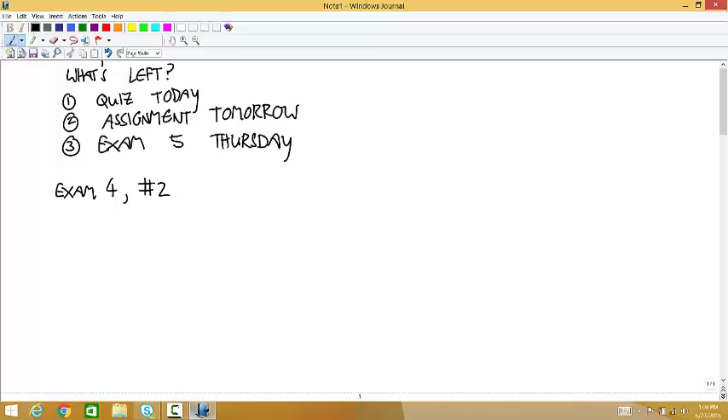Okay, let me go over number 2 on the exam. No. Yes, it's not 2, what is it? 4, number 2. So here's number 2 on the exam.

You have, bless you, you have to go back to some particle stuff, and then you also have to deal with a bunch of different angles kind of going on at the same time. There's a 45-degree angle here.

There's a pin and slot joint up here where this is 20 degrees from the vertical. And then there's a little cart thing sliding along a 60-degree angle like that.

This is 100 kilograms. This is 20 kilograms. And the first question is, what's the cable tension? And then the second question is, what are the reactions for the beam?

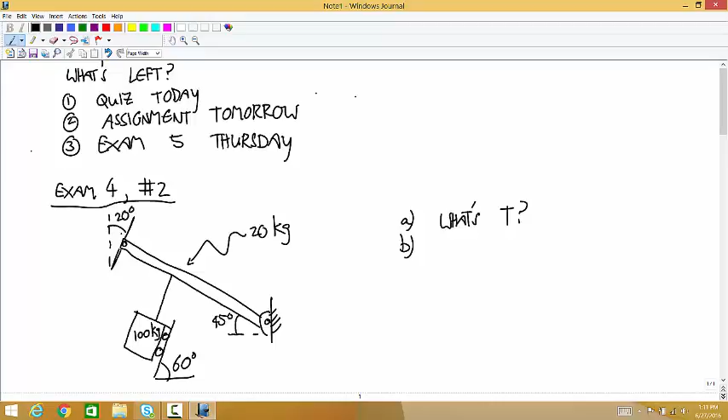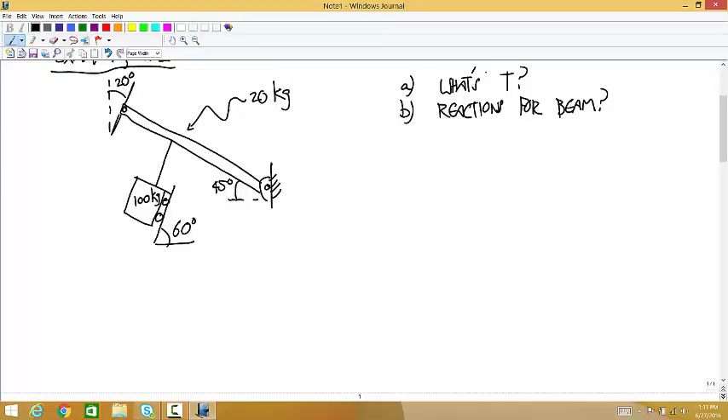Okay, so the way the questions were asked was meant to kind of lead you in the right direction. So first, to figure out that cable tension, isolate the particle, isolate the box, the cart.

Okay, so there's the cart. There's a weight force of 981. There's a normal force, and there's a tension force.

This one is just in the negative y direction. This one, well, let's think of the tension first. This angle is at 60 degrees. This normal force, you can get there by going from the positive x-axis to the direction of the tension, and then another counterclockwise 90 degrees. So 60 plus 90 gives you 150 for that normal. So that angle's 150.

So Newton's second law says 0 equals negative 981, plus T times cosine and sine of 60, so 0.5 T, 0.866 T, and then plus N times cosine and sine of 150.

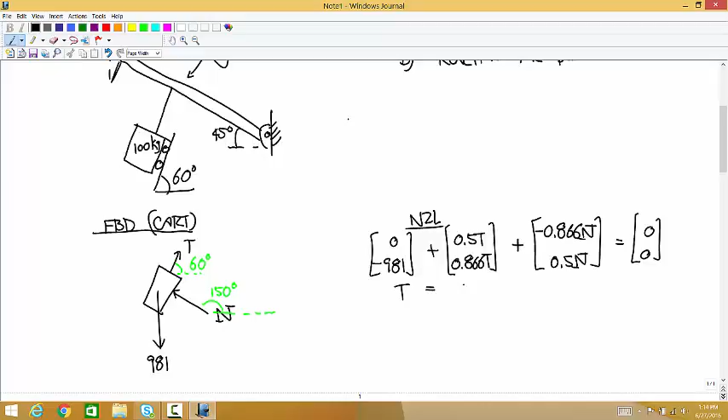You can also calculate the normal force, but I didn't ask for that specifically. And now that you have that tension, now you can isolate the beam.

The free body diagram looks like this. You have a pin joint down here, so I'll call that reaction force. It's a full force vector. I'll call it RA. Then there's a weight at the midpoint of 20 times 9.81, so 196.2.

And then there's a cable tension that's pulling in that direction. Let me make it clear that that's not perpendicular to the beam. That has to do with that 60-degree angle. And since it's a single cable, the force is the same, so that's whatever you got in the other one, about 850.

And then there's the pin and slot force that's not lined up with the beam. That makes an angle of 20 degrees here. I guess from there, I think I'll just stop there. But now you just write out the table, write out Newton's laws, and calculate.

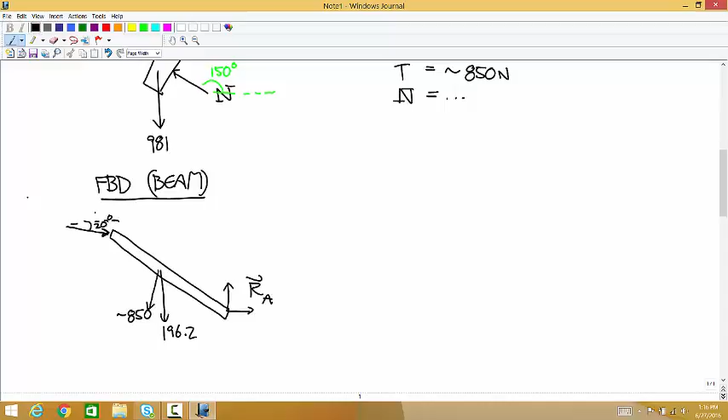You have, oh, I didn't put a label on this. Let's call that RB, that's a scalar. So you have 3 equations, Newton's second law and the rotational equation, 3 unknowns from RA x and y components, and then RB. And you can solve it.

Any questions about that? Here, Joey. Thank you. All right.

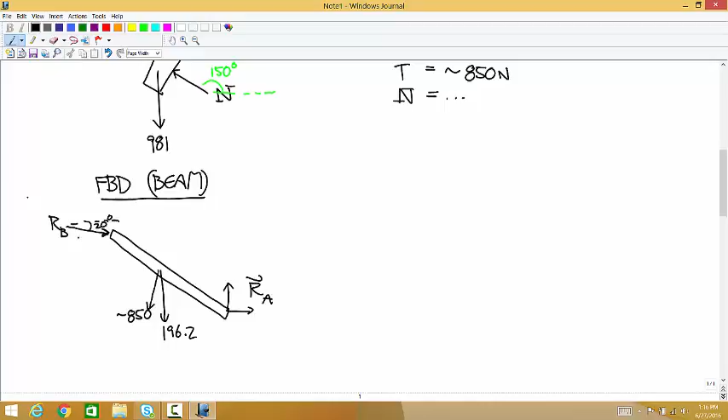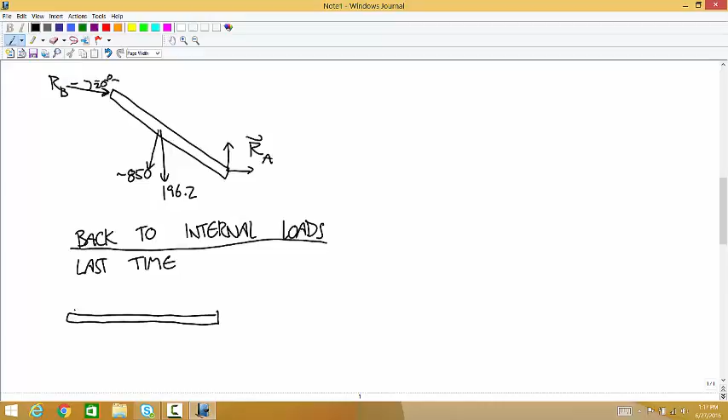Well, last time we did, so going back to internal loads, last time we did an example problem that was like this.

This time we're going to do an internal loads problem like this.

Quick question, please. Since you said that we're going to cover friction on the last exam, does that mean that we're going to have homework for friction due tomorrow, or no? No, it's not going to be due, but you'll just have to prepare on your own with the practice problems.

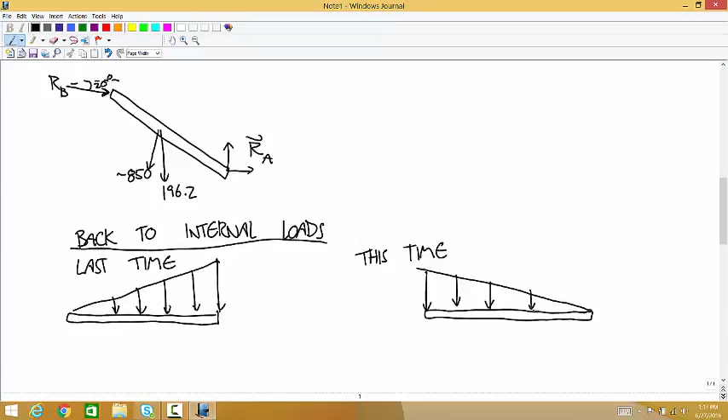Okay, so you look at that, and it looks like it's probably basically identical. We're going to see that working from the left, it's not identical. And so Alani, of course, more than anybody else, is like, well, I'm going to do it from the right, because that's her obsession.

But you could, of course, see problems where there's one like that, and then what are you going to do? So you got to learn how to do this. Okay, so what's the difficulty? This is harder. Why?

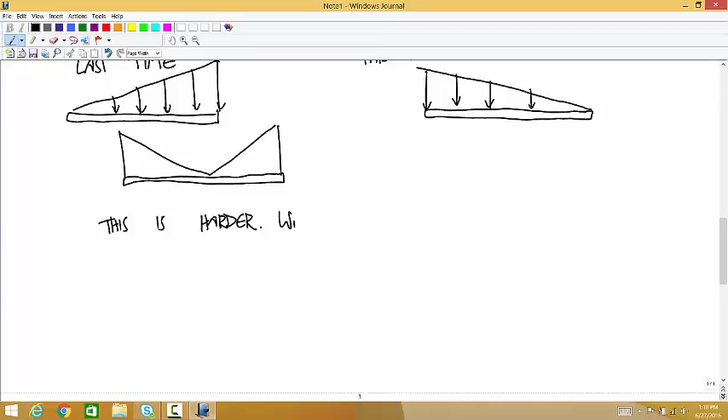The reason is, so this is your beam, and where I drew the end of that black line, let's say that's where we're doing our cut. And let's say our distributed load looks like this. When the triangle is facing this direction, when we did our cut, we just got a smaller triangle, right? When we do the cut this way, it chops off the identity of the triangle, the thing that makes it a triangle.

It chops off its point, and so now we have this trapezoid we have to deal with. And it's just kind of a mess. I mean, we're going to think through it the exact same way, but we're going to have to deal with a little more complicated geometry.

Okay, so the way we're going to do this is we're going to break up this trapezoid into a triangle, sitting on top of a rectangle.

The value of, let's say, the height of the rectangle is equal to our function q, that for any x value gives us the height of the distributed load. If we call this value, I don't know, call that capital Q.

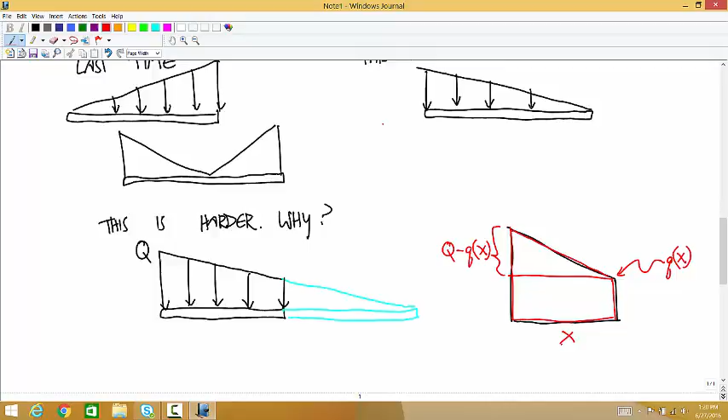And so we end up with one point force when we go from the distributed load to a point force acting at the centroid of the triangle. I'll call this area of the triangle. And another point force acting at the center of the rectangle.

Okay, none of this is horribly hard to understand or anything, it's just more steps. Any questions about the thought process on this? Okay, well, let's just do an example.

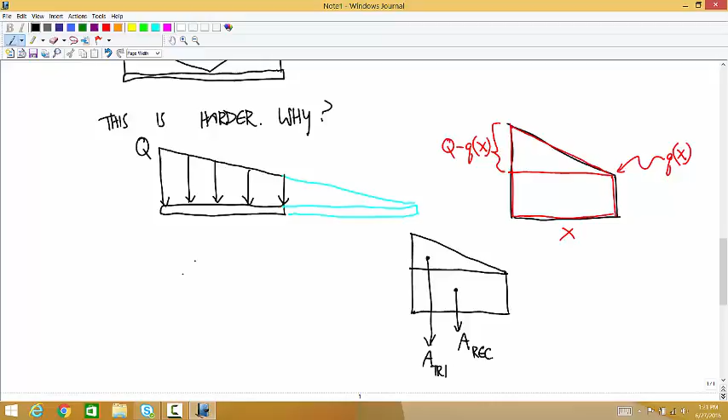What? Are we going to have 2 point forces? Yeah, so you could combine them by finding the centroid of the trapezoid and the area of the trapezoid, but there's no benefit to it. So you might as well just treat them as two separate. So instead of representing it as 2 point forces, as 1 point force, we're just going to represent it as 2, and it works the same way.

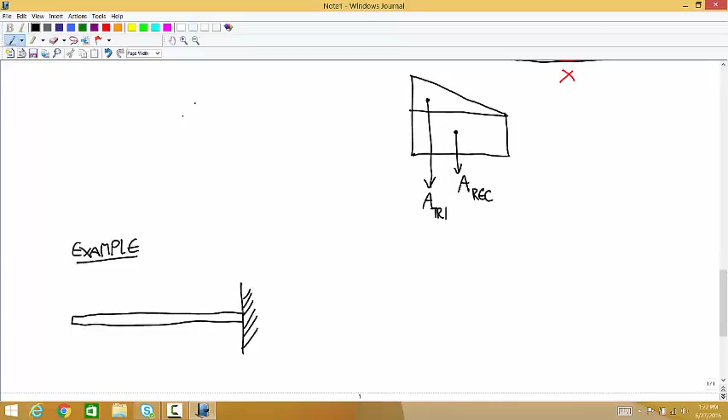Okay, so let's say we have a cantilever beam coming out from the wall on the right and a triangular distributed load with a maximum height of 5,000 newtons per meter and a length of, let's make this 2 meters.

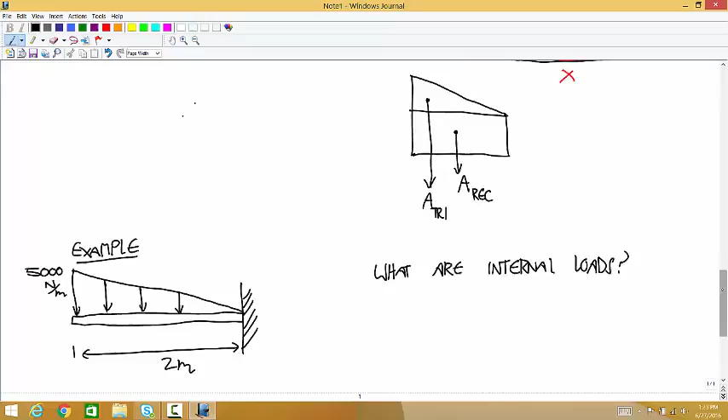What are the internal loads? So what do you think when you see a cantilever connected to the ground on the right side? Yeah, you can just go straight to internal loads because that's not going to come into it. So you think like, Yahoo! Okay, so we can go right to the cuts.

And there's, how many cuts are there going to be? Just one, because the only places where the subfunctions are going to change are the two endpoints. N is 2, so you just have one cut. So x is going to vary between 0 and 2.

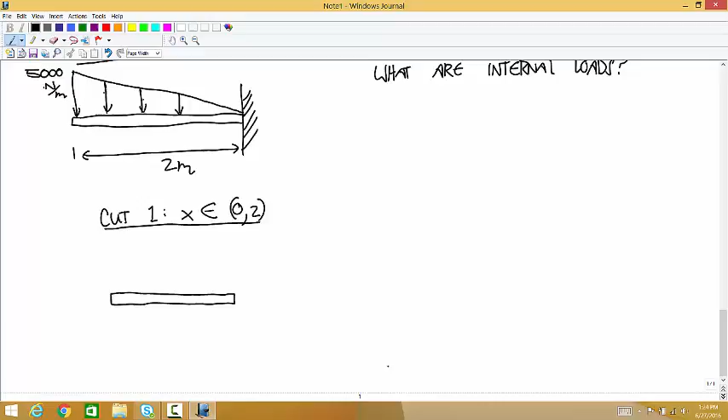And so there's the isolated piece. There's still part of the beam that I'm not drawing over on the right. And so the distributed load looks something like this. For any x value, it looks qualitatively like this. So there's the distributed load, and it's 5,000 over here because we always include all the way to the left end on our isolated body. And then T, V, and M.

All right, well, let's think about this trapezoid. The first thing we have to do is come up with an expression for the function Q that represents the height of this, that represents this line function. So...

Q as a function of x is equal to mx plus b, right? It's a line. What's the y-intercept? When x is equal to 0, what's this equal to? Yep, so it's equal to mx plus 5,000, with the triangles going the other way, when x was equal to 0, q was always equal to 0.

So this is the first time we've had a y-intercept. And then what's the slope? Yeah, it's rise over run. The rise is negative 5,000. The run's 2. So this is negative 2,500x plus 5,000. Okay?

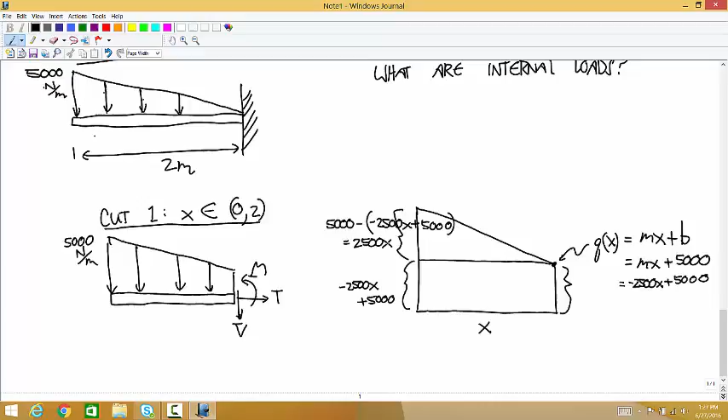Okay, so the area of the triangle is 2,500x, that's the height, times the width, divided by 2, so 1,250x squared. And what's the location of the centroid of the triangle? Yep.

And then the area of the rectangle is the height, which is negative 2,500x plus 5,000, times the width. So you get a value of, I'm going to write it as positive 5,000x minus 2,500x squared. And what's the centroid of the rectangle? Yep, that's just right in the middle of that rectangle, so x over 2.

And now I can redraw this free body diagram. We have a force acting at the midpoint with a value of 5,000x minus 2,500x squared. Then we have a force a third of the way along the beam of 1,250x squared. And then we have the internal loads, T, V, and M.

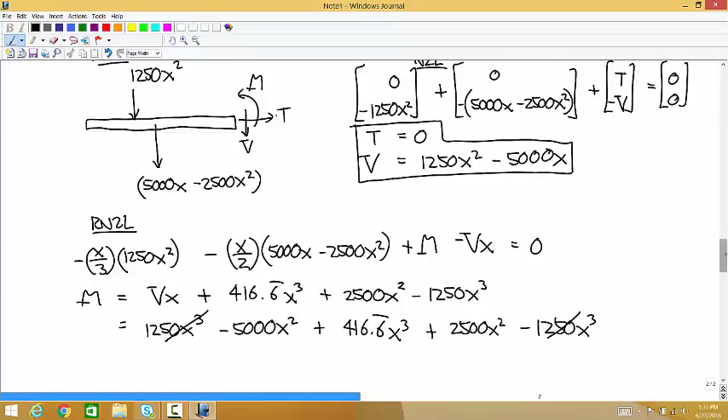Well, these two cancel out. And you get negative 2,500x squared plus 416.6 repeating x cubed.

Okay, we can check the derivatives. Dm dx needs to be equal to v. That one works. That one works. Okay, good.

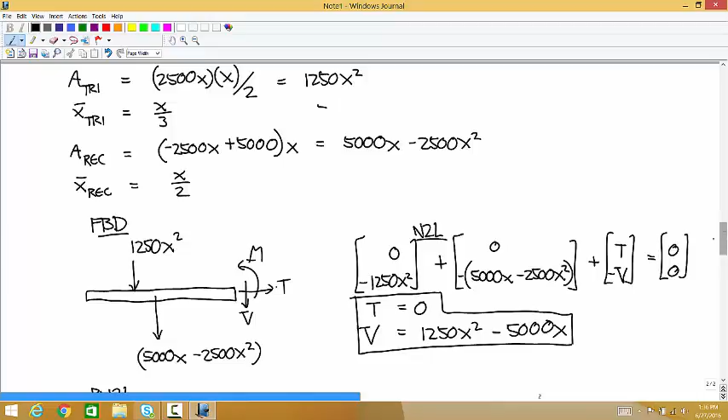Any questions about that? So those are tedious. That takes a lot longer than if the triangle's facing the other way.

The other kind of problem that, so the last internal loads topic is internal loads in structures. So the only thing that changes when you're dealing with a structure is that the member you're looking at isn't already horizontal. And we've only done these calculations, internal loads, when the beam is horizontal.

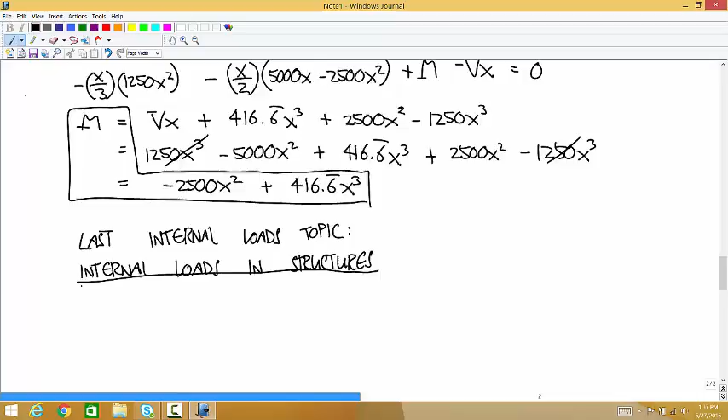So what you have to do is choose a new coordinate system. So what's the issue? So let's say that you're starting with this structure. You solve the structure for the external loads.

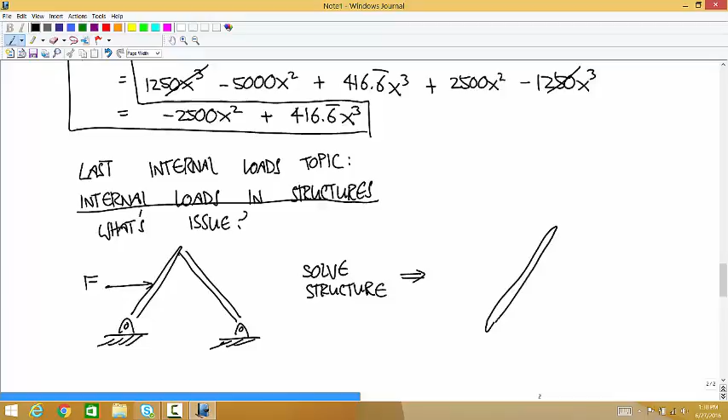And you get something that looks like this. You solve for this vector RA down here. You solve for a force vector F12 here. But now how do you go from this? So now you have values for these. But how do you go from this to calculating internal loads?

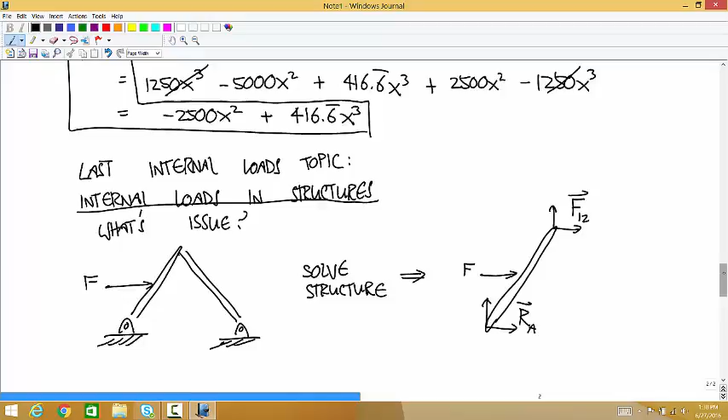There are a couple ways you could do it. I think the harder way would be to leave it in this orientation and then choose unit vectors going in the direction of t and v and m and do the calculation that way.

Instead, so if our coordinate system is oriented like this, once we've solved it, we have a coordinate system like that. If we could re-express all of these vectors in terms of a coordinate system with the x-axis pointing along the beam, then we can do it the way we're used to. So we're going to use a rotation matrix to re-express these force vectors in a coordinate system with the x-axis along the beam.

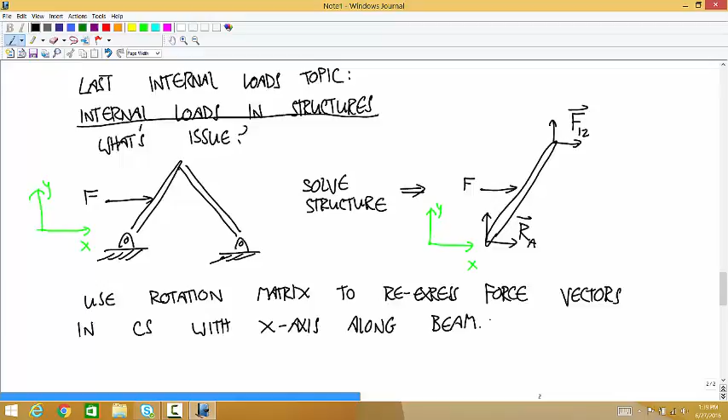In this case that I just drew, we want a rotation matrix that goes from this to this. Then you can just draw it horizontally. The way that you draw it doesn't matter mathematically. Mathematically, all that matters is the relationship between the forces and the coordinate system.

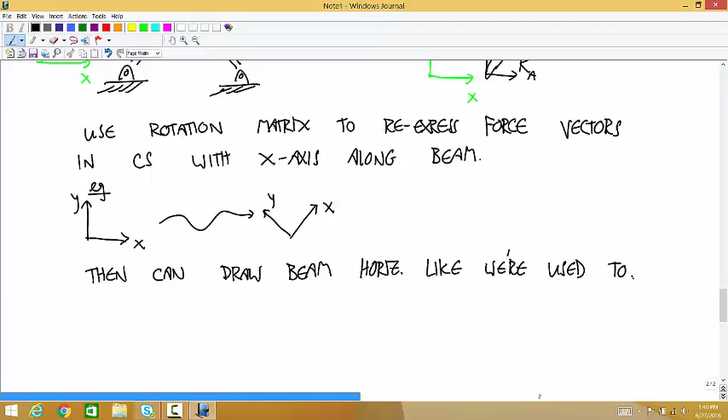So then we can draw the beam horizontally like we're used to. Okay, so here's an example. So let's say that there's a beam that makes an angle of 30 degrees with the horizontal and makes frictionless contact with the wall.

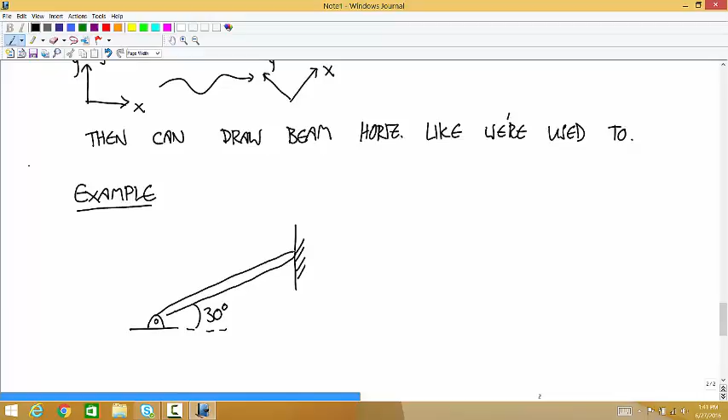Let's say this is 1,000 newtons acting down, and let's call this half a meter. What are the internal loads of this beam?

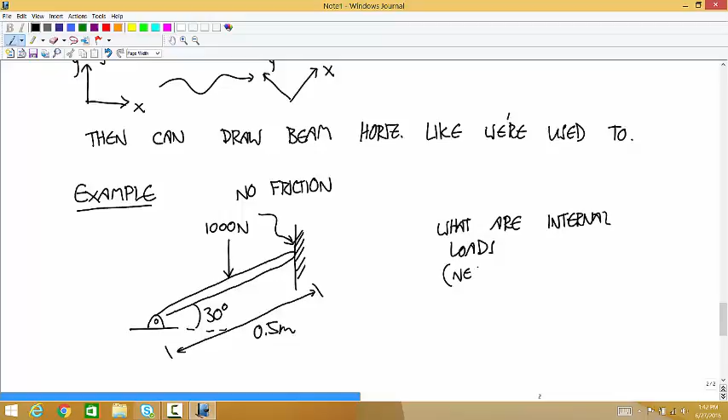I'm going to neglect the weight on this one. In fact, I'm going to neglect the weight in any examples I do in this topic, because if you don't remember, the weight acts like a distributed load, and we'd have to deal with rotating the distributed load, which is surprisingly similar to this, but we've got to stop this analysis somewhere. If you're curious about it, I'd be happy to talk to you about it. You might be able to figure it out on your own, how you'd deal with weight in this case, but we're going to be neglecting the weight on these.

Notice that even though this isn't really a structure, this problem includes the difficulty that internal loads in structures has. We're starting with a beam that's not lined up with our coordinate system, and so once we find the external loads in a coordinate system like this, we're going to have to re-express it in a coordinate system where the x-axis points along the beam.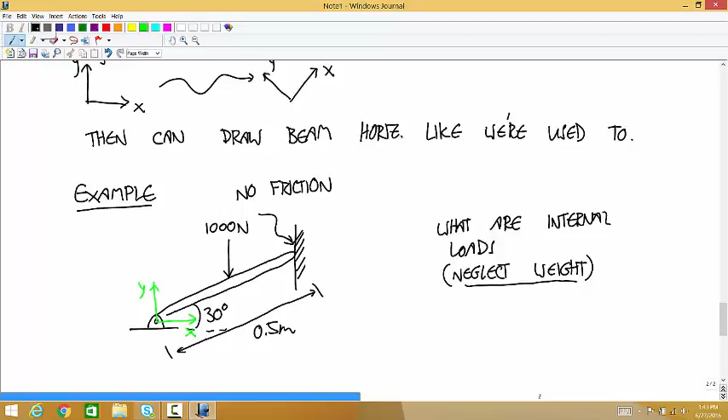Okay, so for the free body diagram, we have the reaction force there, I'll call it RA. We have a weight force of 1,000, and then we have the frictionless contact. I just want to make this look horizontal. Call that RB. We know the direction, so that's a scalar variable.

I've noticed a few people starting on tests to skip the first two columns of this table. That's great if that makes sense to you. If you can just look at it and figure out what that rho vector is going to be, that's great. In fact, I think if you have time, see if you can figure out how to do that, because I think it gives a helpful insight into what that rho vector is.

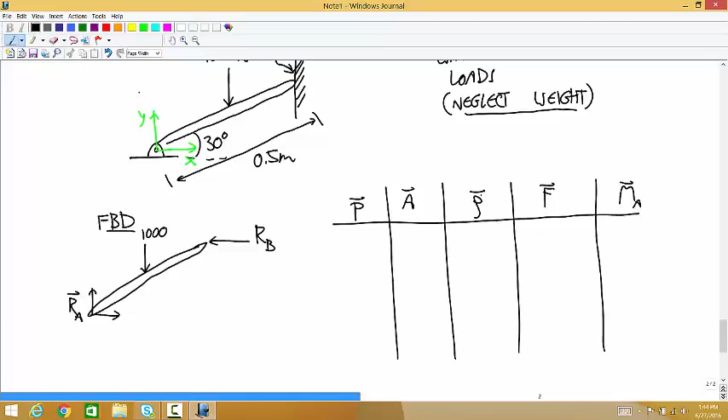Okay, so the origin is down here at A. So for that force RA, we're at the origin. I'll make that the about point, so there's no rho vector. Force vector is RAX, RAY, and so there's no moment.

Then up at B, we're at the point 0.433, 0.25. That's also the rho vector anytime the about point is the origin. The force is negative RB, 0. And so you get positive 0.25 RB.

And then the midpoint is 0.217, 0.125. The force vector is 0, negative 1,000. So you get negative 217.

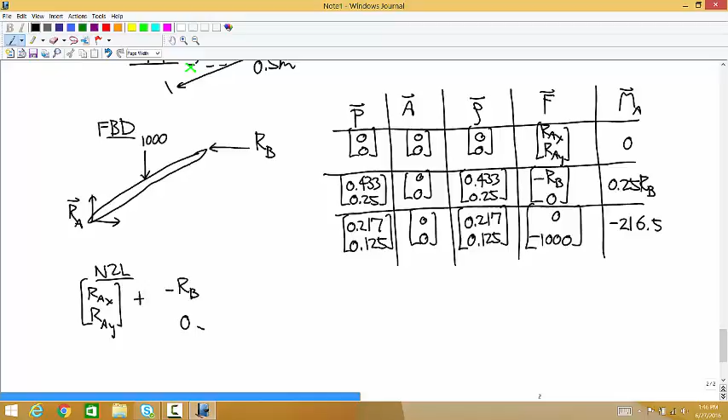Maybe I'll make this 16.5. Okay, so Newton's second law says RAX, RAY plus negative RB, 0 plus 0, negative 1,000 is equal to zeros.

The moment equation says 0.25 RB minus 216.5 is equal to 0. That gives RB is equal to 866.

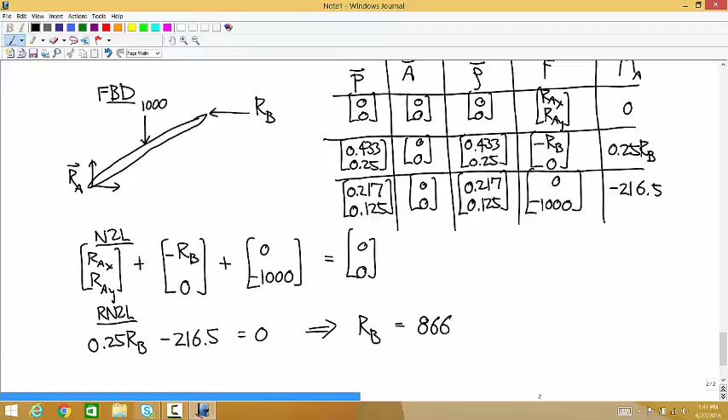And then what's RA? 866. The X is 866? Yes. And then Y? 1,000. Okay.

By the way, I don't usually notice this stuff, but on the last exam, there must have been 10 different people who got the equation 0.5 R is equal to 100, and said R was 50. It was the weirdest thing I've ever seen. I don't really have any insight into that, but over and over and over again, I was like, oh shoot, we forgot to cover algebra 1.

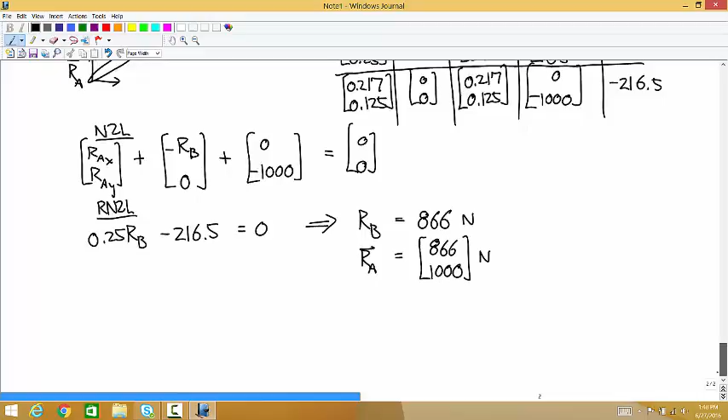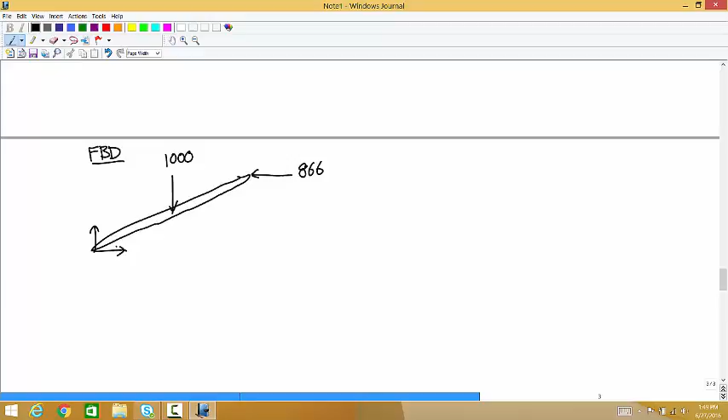Okay, so if we go back to the body now that we've calculated these loads, we have the 1,000 acting there. We have 866 this way. And then here we have 866, 1,000.

All right, so what we want to do now, we have it like this. We want to figure out what rotation matrix we have to apply so that we can re-express all of these force vectors in this coordinate system, where this angle is 30 degrees.

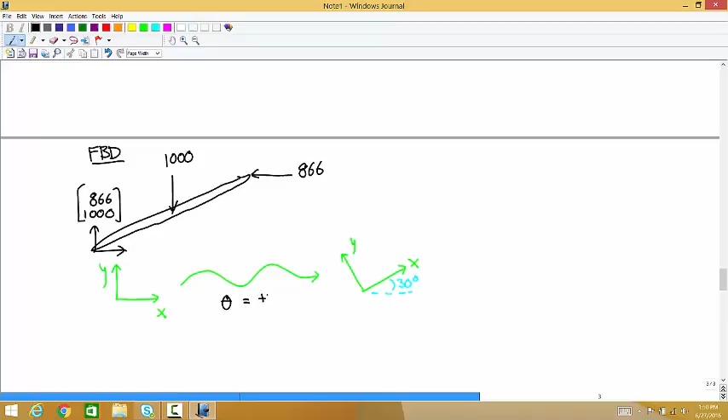Okay, well, what we need to do that is our theta. To go from here to here, is that a clockwise or counterclockwise rotation? Okay, so this is equal to positive 30 degrees. Our rotation matrix is cosine theta, sine theta, negative sine theta, cosine theta. And so we get a matrix of 0.866, 0.5, negative 0.5, 0.866.

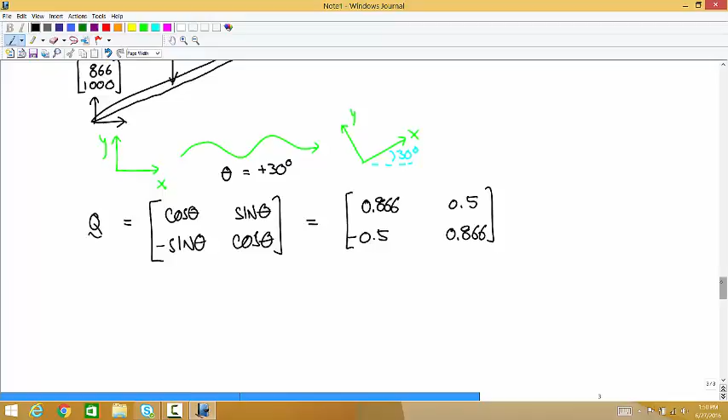And now one by one, we're going to re-express these force vectors in the new coordinate system.

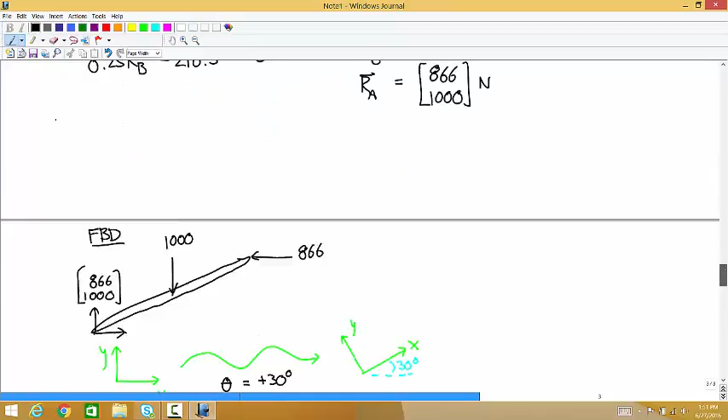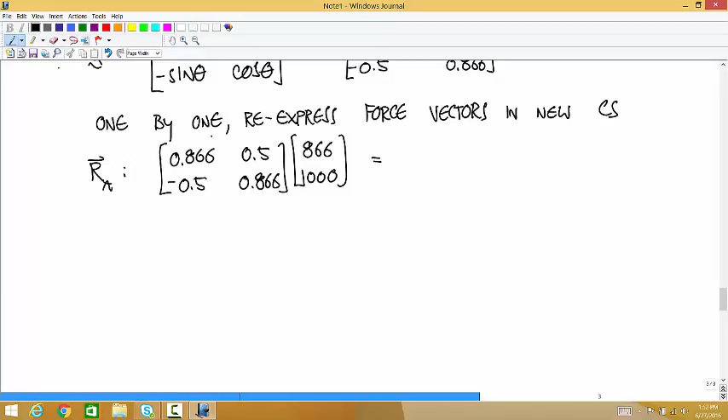Okay, so the first one, let's do RA. So we have the Q matrix, 0.866, 0.5, negative 0.5, 0.866, times our old expression for RA, which is 866, 1,000. You don't really need to know how to do this by hand, your calculators will do it for you, but if anybody has any questions about this, let me know. That is... 1250. And then what's this one? Positive 433. That's RA expressed in the new coordinate system.

Let's think about this. Think about what this vector looks like. So I'm going to start with the old coordinate system. There's the old one. So this vector looks like this, something like that, right?

Now we want to come up with the components of this vector in a coordinate system that looks like this. So what would you expect to happen to the x component? Would it get bigger or smaller? It should get bigger. And what should happen to the y component? Smaller. They're both still positive. Can you visualize what I'm talking about here? No?

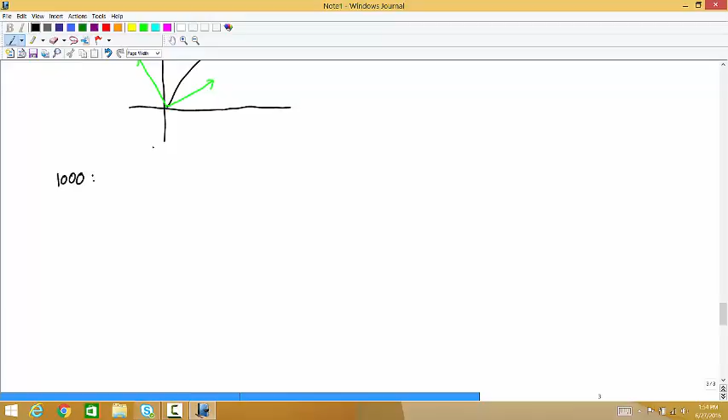Okay, so now let's do the 1,000 Newton force. Why wouldn't X be smaller and Y be smaller? Okay, so here is the projection onto X of the old, and here's the projection onto X in the new. So you're comparing this length to this length, and because of the precision of my drawing, you can tell that this is longer.

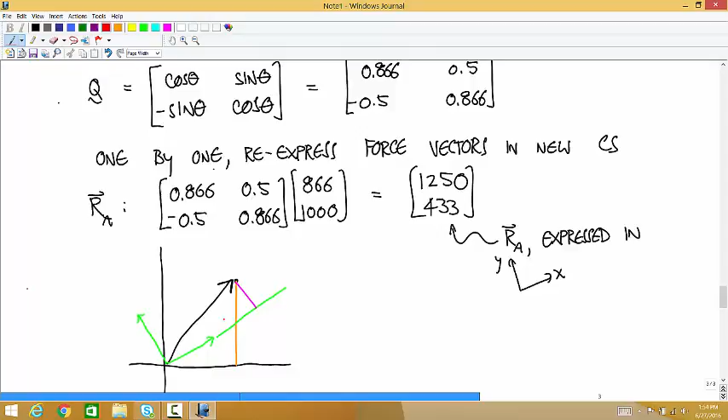So if you were just to say negative 433, then I don't know, I don't follow why you would. Let's talk about that later, okay? I'm not sure.

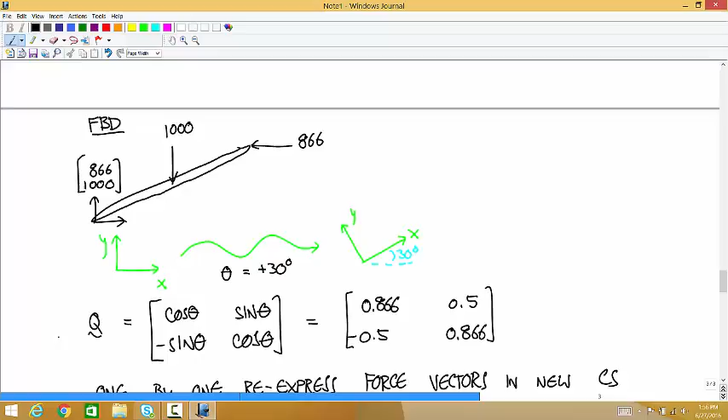So now look at this 1,000 Newton force. That's acting in the negative y direction. So if you express that as a force vector, the components are 0, negative 1,000, right? So we're going to multiply 0, negative 1,000 times this rotation matrix. And even I can do this one. That's negative 500, negative 866.

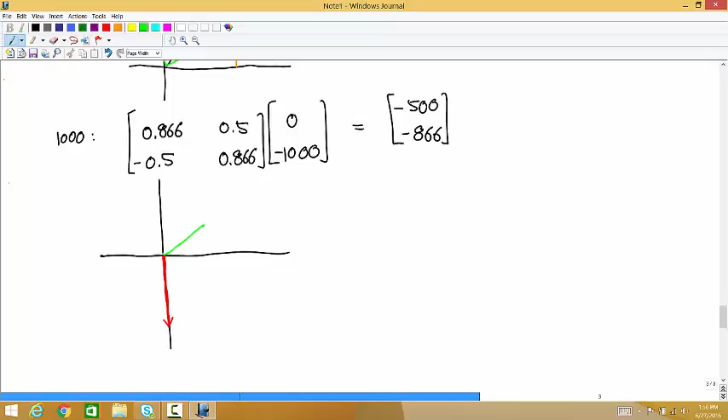Okay, so let's visualize this one again, because it went so perfectly last time. So there's the old coordinate system. This vector is this, right? So now what happens if we want the components in a new coordinate system like that?

Well, first, what quadrant should it be in? Should be in the third quadrant. Both components should be negative, and we have that. And then, I don't know. That might be about all the eyeballing we can do on this one.

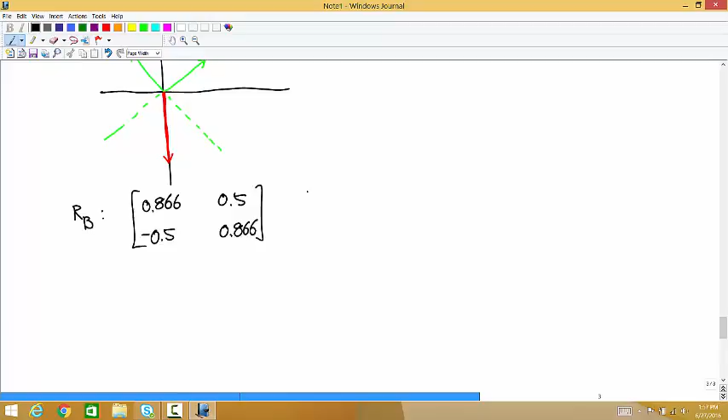And then the last one is that force vector that I called RB. So we're going to take the rotation matrix, and multiply it by the vector RB, which was - what are the vector components for this? Negative 866, 0. And so that is negative 750, positive 433.

So let's think about the components again and make sure that those signs make sense. If we start out in this coordinate system, and the vector that we're looking at is this, and then we re-express it in that coordinate system, what quadrant should the vector be in the new coordinate system? Second, so it should have a negative x component and a positive y component, and that's what we have.

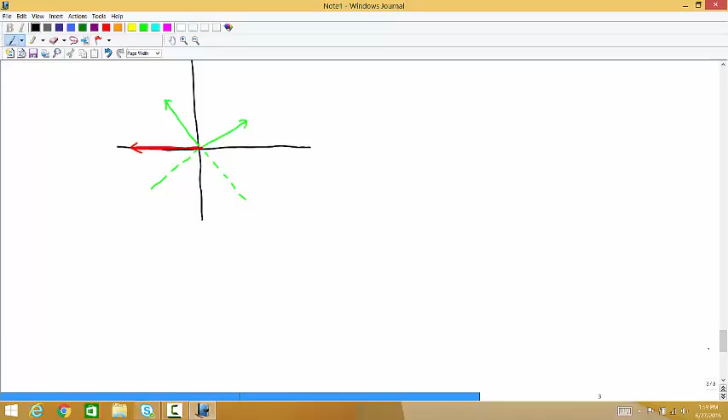This is the first, second, third, fourth. So the vector itself doesn't rotate? The vector stays there and the coordinate system moves. That's right. So yeah, if you look back at all those examples, that's what's going on.

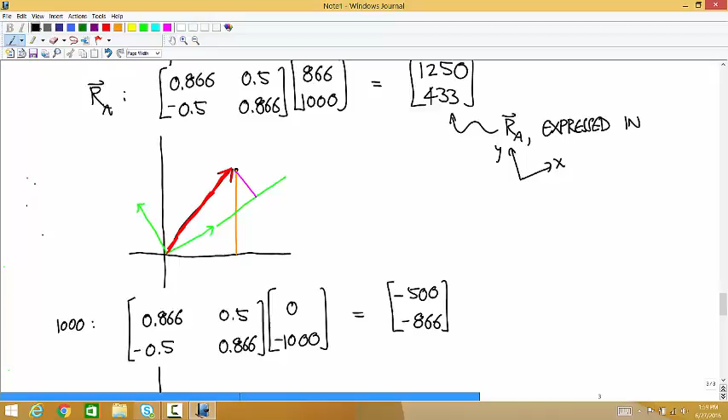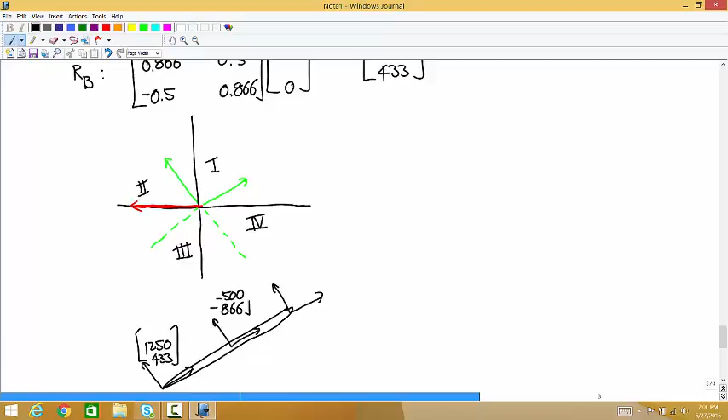Okay, so now what we have is this. We have a beam where our force vectors now are expressed in this coordinate system. And the values are 1250, 433. For the middle one, negative 500, negative 866. And for the right end, negative 750, positive 433.

And now what do we have to do in order to draw this horizontally? We just have to draw it horizontally, because all we have to do now is turn our head, you know what I mean? So the mathematical part of it was getting the coordinate system and the beam to have the same orientation. Now we can draw it however we want, you know.

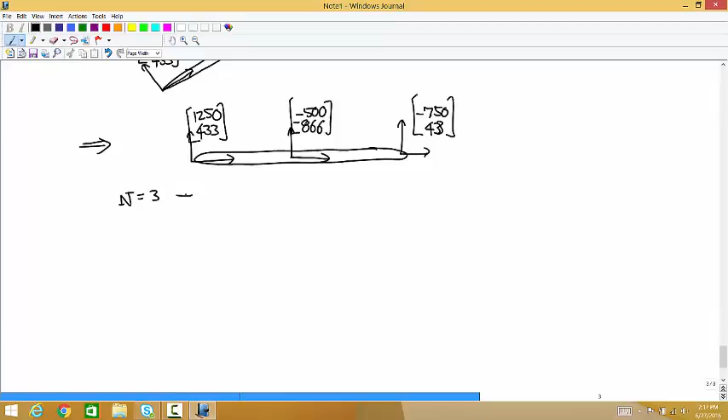How many places are there where the subfunctions can change? N equals 3, so how many cuts do we have to do? 2 cuts. Okay, so cut 1 — what did I say the length of this was? 0.5, so cut 1 is going to go from 0 to 0.25.

So we have 1250 and 433 on the end. And we haven't gotten to the next force yet, so then we just have the internal loads.

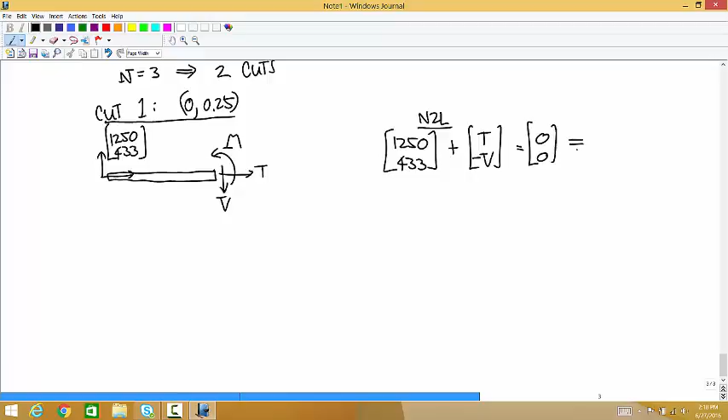So Newton's second law says 1250, 433, plus T, negative V, is equal to zero. So T is equal to negative 1250 and V is equal to 433. So is this in tension or compression? Compression, yep. It's called T because positive is tension; if it's negative, the thing's in compression.

The moment equation says M minus Vx is equal to 0. So M is equal to Vx. So M is equal to 433x.

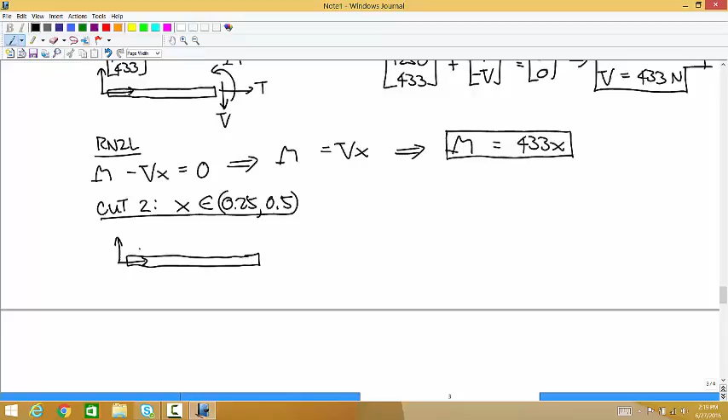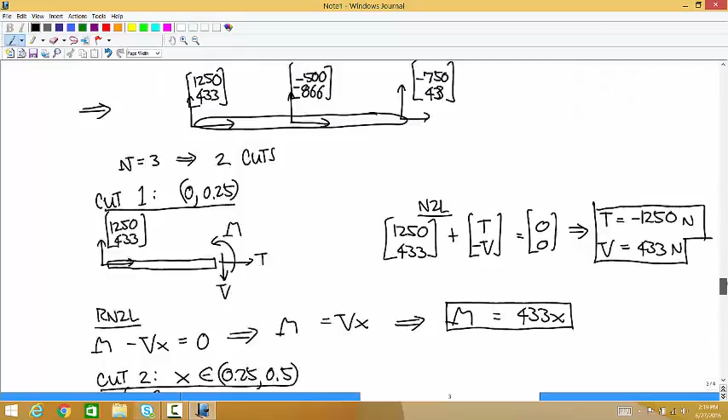And then cut 2 is valid for x values between 0.25 and 0.5. We still have the forces at the end. Now we also have the ones in the middle — that's negative 500, negative 866, I think. And then we have the internal loads.

So Newton's second law says 1250, 433, plus negative 500, negative 866, plus T, negative V, is equal to zero. So T is equal to negative 750, and V is equal to negative 433.

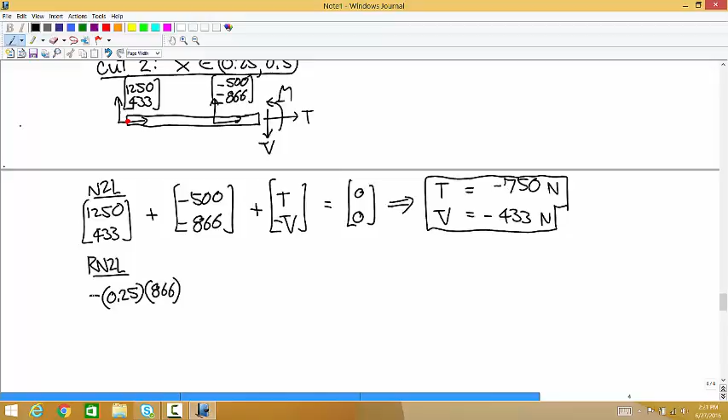And the moment equation says, okay, so we have a downward force of 866 with a moment arm of 0.25. Would a downward force make this rotate clockwise or counterclockwise around this point? Clockwise, so this is negative, plus M minus Vx equals 0. So M is equal to 216.5 minus 433x.

And so now what we have is the ability to start with a structure, this complicated thing where very often you don't really have any intuition about what kind of external loads are acting on them. You can solve those external loads and then go in and figure out where on this structure you're most worried about this thing fracturing, which is kind of a satisfying ability. Imagine you start with some wacky structure like those pliers, any one of those complicated structures problems — now we can follow it all the way through and figure out where the internal loads suggest we want to be careful if we're designing this object.

What we can't do, like I said, is distributed loads, but it really isn't that much of a jump from where we are to being able to do it with distributed loads too.

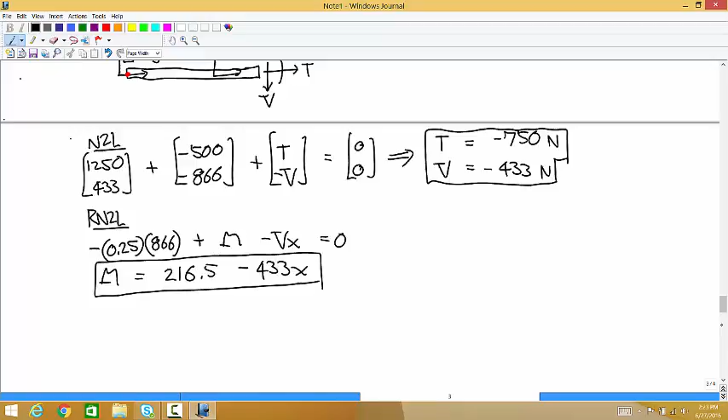If you had a two-force member, for example, those two triangular structures — if you were to solve for one of them, would you be able to say that the other one is the negative effect, or is that just... No, not necessarily. But what you can say with a... okay, so say we had this thing.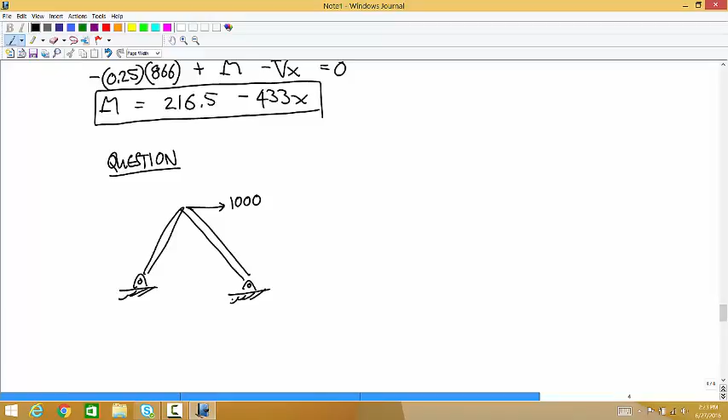Let's call this member 1 and this member 2. What do we know, without doing any calculations, about the internal loads of members 1 and 2? In this case, they are equal and opposite. I don't think that's generally true in a structure like this, but this structure is made up of two-force members, right? Yeah, so in this case, one's in tension, one's in compression.

The thing I want to get at here is two-force members can't have any shear force, can't have any bending moment. All they have is, by the nature of what tension and compression is, an internal tension or an internal compression. And that's all cables can have too, is an internal tension. So if you calculated the external loads, rotated the coordinate system, redid all this stuff, calculated the internal loads, you'd always see, if you did it right, that the shear force is 0 and the bending moment is 0. That has to be the case with two-force members.

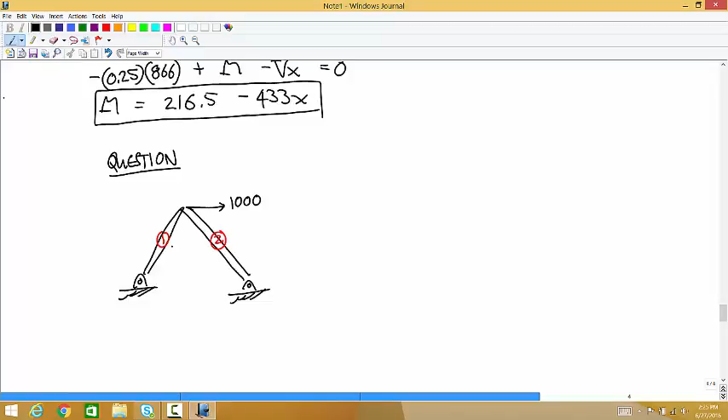I want to do one more thing, so the next thing we're going to talk about is friction.

So if you had two beams that were perpendicular to each other, straight up and down and straight left and right, would you have to turn one of them to solve, or can you solve to do the internal loads?

You could always do the internal loads like this. So if you had a member like this and you wanted to calculate the internal loads, and you had all your forces expressed in this coordinate system, and you didn't like rotation matrices, because some people like different stuff, you don't like that, you could define tension that way, shear force that way, bending moment that way, by multiplying these scalars by unit vectors in those directions, and then do the calculations the same way.

I'm saying if you have two of those. Do the same thing. Okay, so yes, you can do that if they're perpendicular. You can do it even if they're not. But I tend to think, I've said this a few times in a few different settings, I tend to think I want to do every problem the same way as much as possible. So I like approaches where you take something, turn it back into the thing you're used to, and then use the method that you've used a million times. To me, that makes it easier to avoid mistakes than thinking about stuff fresh every time, you know what I mean?

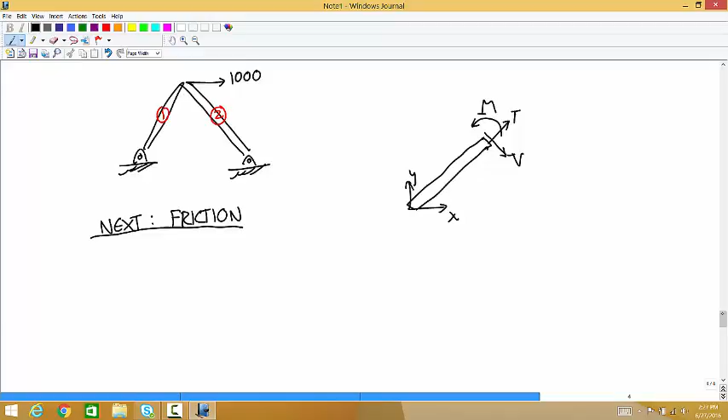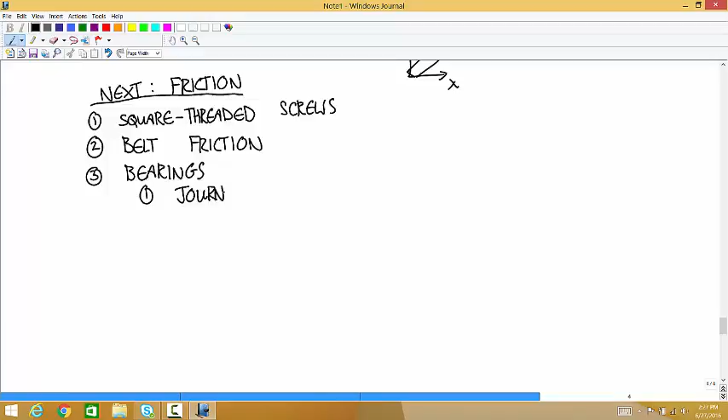Okay, so with friction, we're going to talk about these things. We're going to talk about square threaded screws, a type of threading that you use for really big loads, like in jacks. And we're going to talk about belt friction. And we're going to talk about bearings, two types: journal bearings, which are like pin joints, and thrust bearings, which is like the clutch on a car. I'll draw pictures of those when they come up. So these are the topics we're going to do, and this is going to be the first one, square threaded screws.

Square threaded screws, the calculation is based on something you did a bunch of times in Physics 1. I think the most interesting thing about it is how you get from the actual square threaded screw to this kind of analysis. But for doing the problems, this is the kind of problems we're doing: analysis of blocks sliding on inclines.

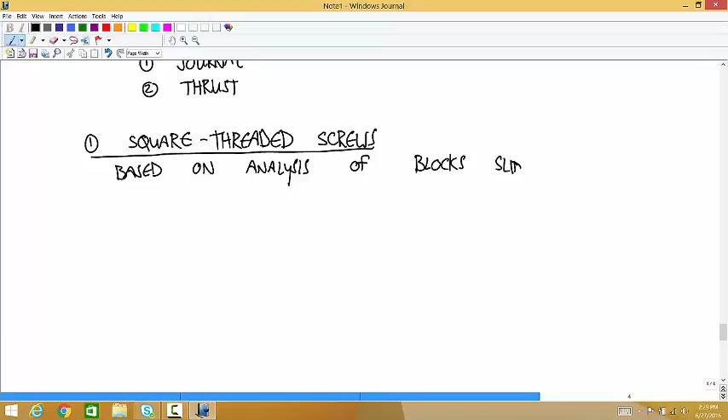So for example, let's say this is 20 degrees. You have a box with a mass of 100 kilograms. You have a coefficient of static friction that's equal to 0.4. Will the block start to move?

The way you did this in the past was you used a coordinate system that had the x-axis oriented along the incline, y-axis pointing out of the incline, and then you had to use trigonometry to come up with the components of the weight force. The weight now isn't just perpendicular to the axes. And that's how we're going to do it here.

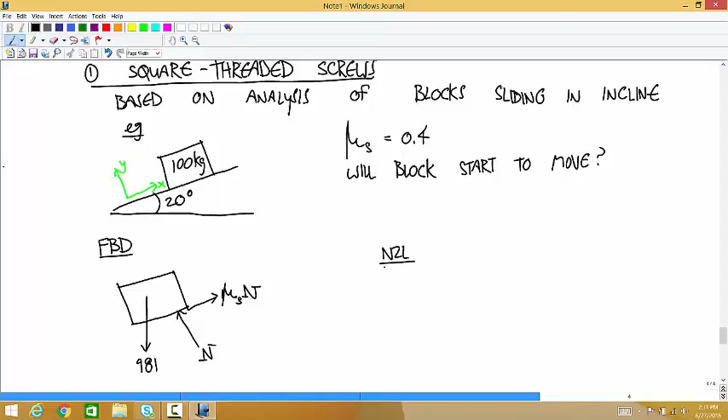So we have a weight force of 981, a normal force like that, a friction force going opposite the direction that the thing would accelerate if there was no friction. So in this case, the friction is going to go this way, and we'll assume that that's equal to mu sub s times the normal force. And Newton's second law says, for now I'll write it as the weight force plus 0, n, plus mu s times n, 0, is equal to 0.

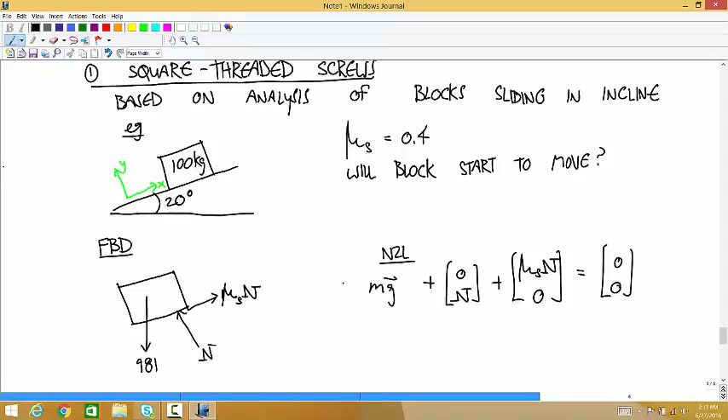And the trickiest thing about this is expressing the weight force. So I just want to point out that you can use the rotation matrix to express the weight force now. Once you get used to doing it in your calculator, it's faster than thinking about the triangle. So let's use the Q matrix to re-express the weight force.

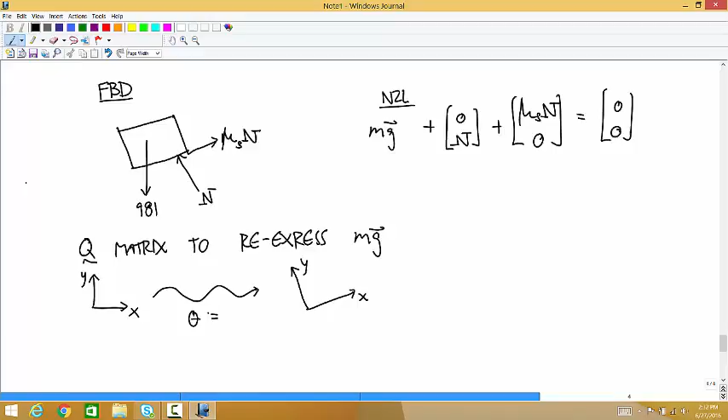So we know the weight force is really easy to represent in this coordinate system, and now we want to re-express it in one rotated like this. So what's the theta for the rotation matrix? 20, yeah, plus 20. So Q is equal to 0.94, 0.342, negative 0.342, 0.94.

And so mg expressed, relative to the new coordinate system, is equal to 0.94, 0.342, negative 0.342, 0.940, times the weight force in the old coordinate system, 0, negative 981. And you get a value of like negative 335, negative 921.8.

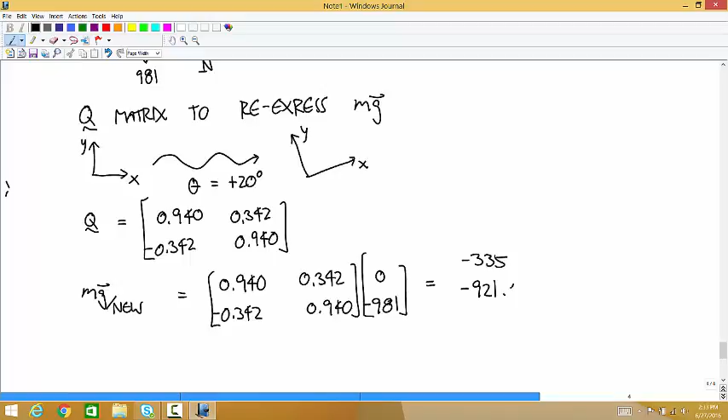Plug that in for the weight force, and then you solve. Okay, so next time we'll talk about how to take a square-threaded screw friction problem and put it into this form.